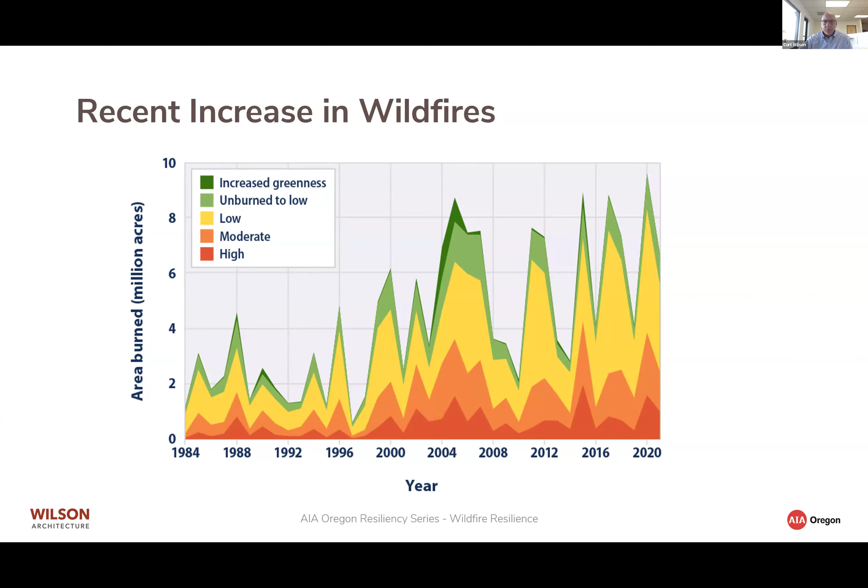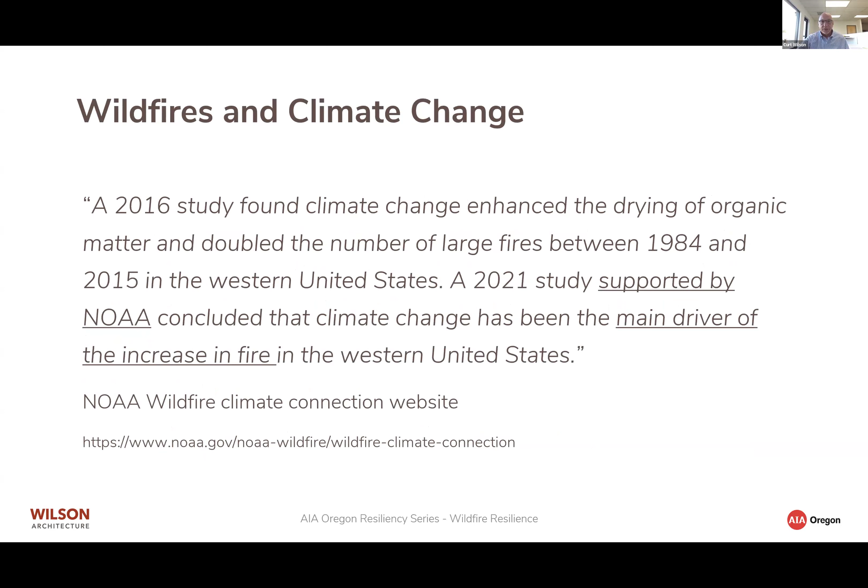This is information from EPA that speaks to this. You'll notice there are website references at the bottom of a lot of these slides, and these slides will be available later. But we're seeing it documented what we all see, which is that wildfires are a greater risk on the West and other places. It's also, I think, pretty well understood that there's a relationship between climate change, drying and warm conditions, and wildfires. And so again, wildfire resiliency is really important because this is part of life in the West.

I would appreciate if you would think about your roles here in listening to this information as both a design professional and as a community member. We're going to talk about some information that will help you be a better advisor to your clients, and hopefully something in here will help you grow your technical proficiency as it relates to building systems. But we also need to think about our roles as advocates for public policy that we want to see, and also volunteers in helping our neighbors. So there's a little bit of all of those things in here.

And why am I speaking about this? Heather mentioned some of my roles as practicing architect, and I was the executive director. I have been involved, prior to being executive director for AIA Oregon, I was legislative chair for AIA Oregon for about 20 years. So advocating at the state public policy level is something I have a lot of experience with. I was executive director in 2019 through 2021, so throughout the period of COVID in 2020 when wildfires occurred.

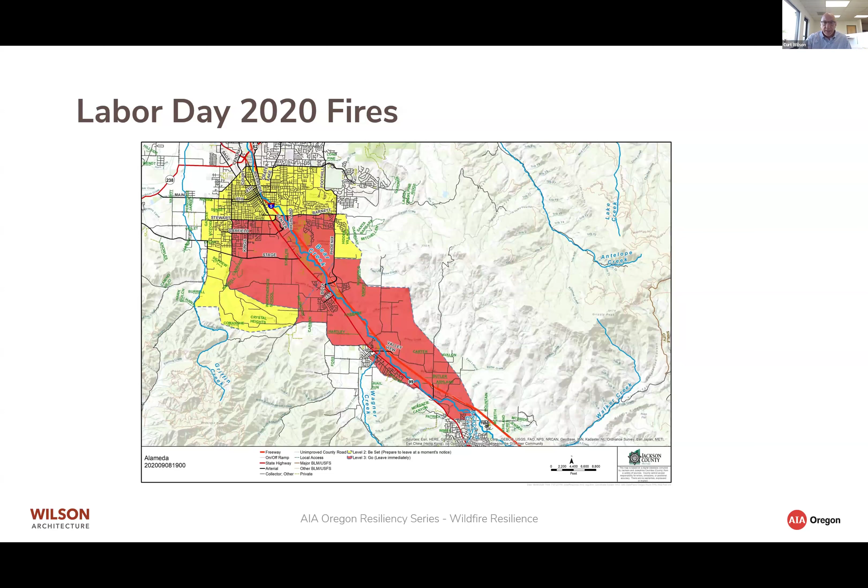One of the recurring themes here is that in a fire, some of the structures that so many of our people in our communities are dependent on for low-income alternatives are lost and not necessarily adequately insured, and therefore aren't rebuilt. So we'll just keep thinking about this as a housing problem.

The Holiday Farm Fire, though, is the one I'm going to focus on. It occurred in the McKenzie River Valley, starting just outside of Rainbow. If you recall that weekend, it was an unusual weather forecast because our normal weather patterns are winds blowing from the ocean to the east, carrying that ocean moisture. We had a red flag warning, the first time I remember hearing about one. We had winds blowing east to west, so it was a drier wind, and the winds picked up.

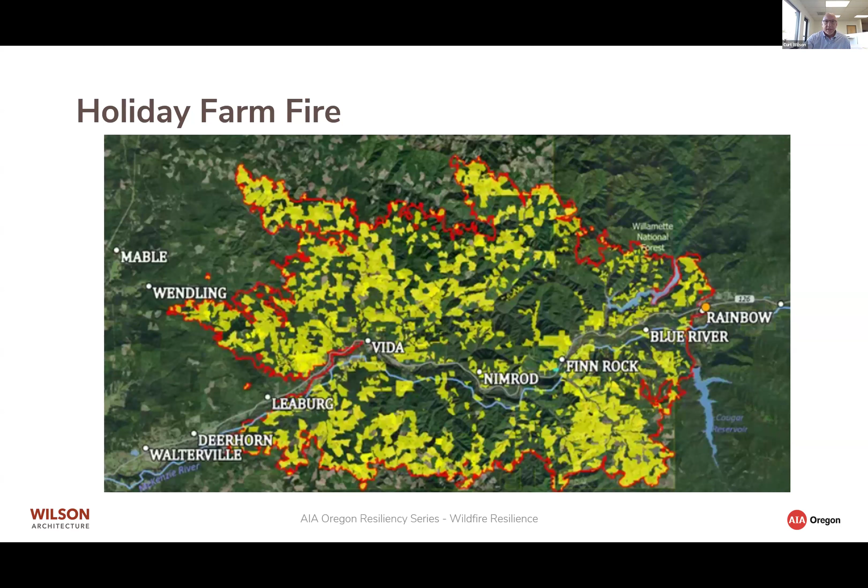The fire started, you can see there's an orange dot on the right-hand side in the east, and then it just blew and went at a very rapid pace down the McKenzie River corridor in the valley and devastated Blue River and these communities. It didn't hopscotch around like a lot of fires do. Most everything in its path, particularly at the beginning, was pretty well devastated.

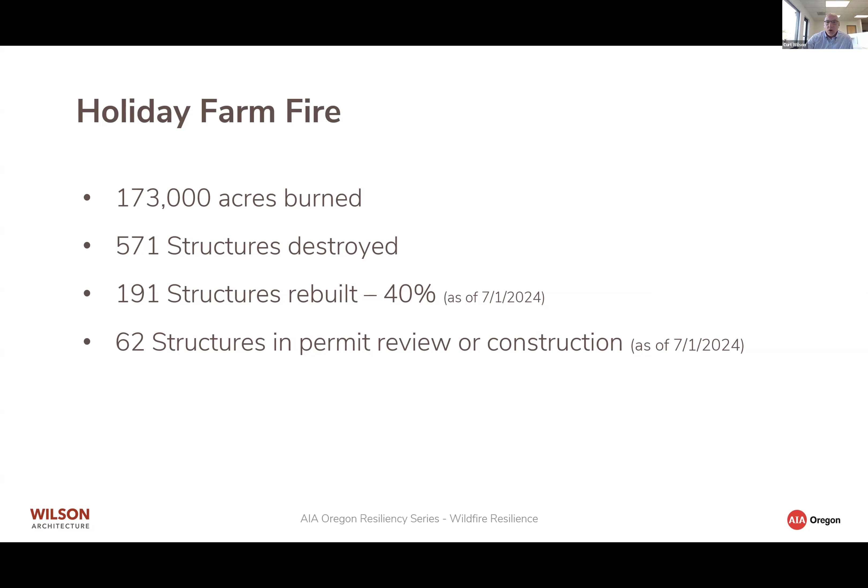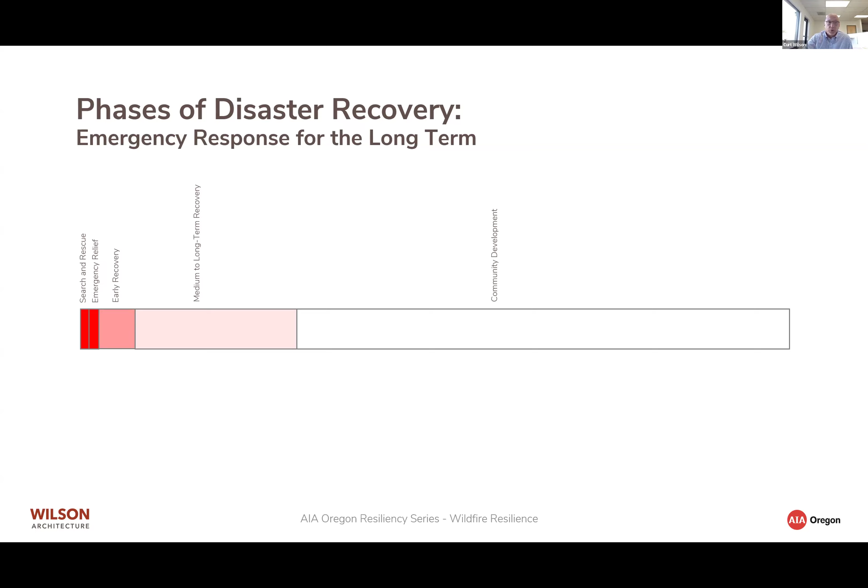So there has been recovery and rebuilding occurring. I go up there a lot because I have not only the clinic project, but another residential project going on. One of the things the fire did was, because of so much loss of trees, it opened up the view corridors in the valley and along the river.

You see a lot more than you used to see, and there's a tremendous number of houses. Many have been rebuilt along the corridor, and I would suspect that many of them have been rebuilt that you see along the river because they were adequately insured. That's an important point here that'll keep coming up.

I'm going to focus a little bit more specifically on Blue River. Blue River is a unique community, somewhat of a historical community along the river with a relatively defined downtown core.

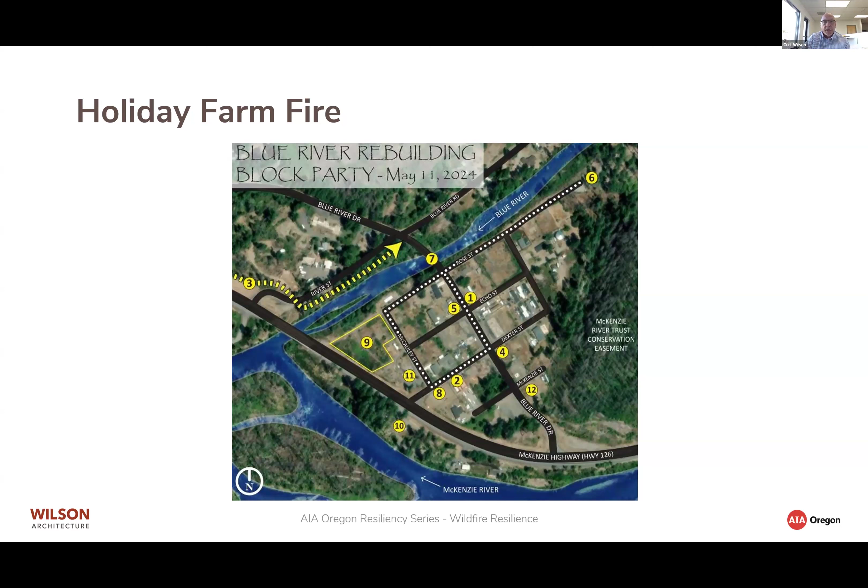But at this point, 4 years in, this is really about a housing production challenge, and either some level of barriers or multiple barriers have occurred for people not to be able to build at this point.

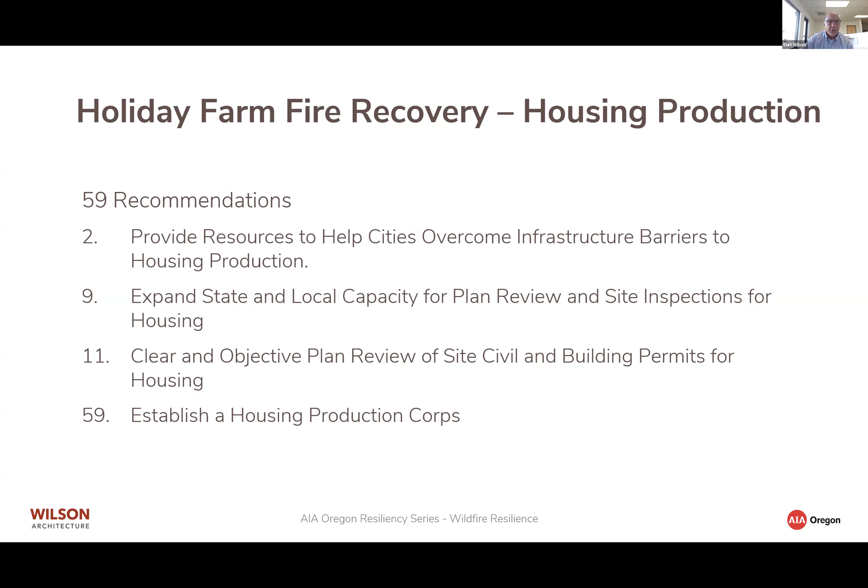The last one I think is also really important, and that is the labor and the staff and the capacity to be able to build. That's been another issue that has affected the McKenzie River Valley in terms of just getting a builder to go upriver and build.

Fundamentally, this is about financial support. You can overcome a lot of problems, but if you don't have the ability to rebuild your house or your business, you're not going to rebuild. And that 50% of the houses that have not been rebuilt, how many of those are never going to be rebuilt? How many people are not coming back to the community? That's a loss for important communities in rural Oregon, and it's a real concern that I have.

There are some things that are going on. I'm not going to speak too long on these, and there's a lot of information that could be shared, and hopefully you'll find, if you're interested, we can help you find some resources.

The McKenzie Community Land Trust has been set up in the area to construct initially six houses on a community land trust system. The community land trust will own the land, and individuals can buy the houses. So it's not only a way to get some houses developed, but it's also a lower entry point for people to be able to get into home ownership.

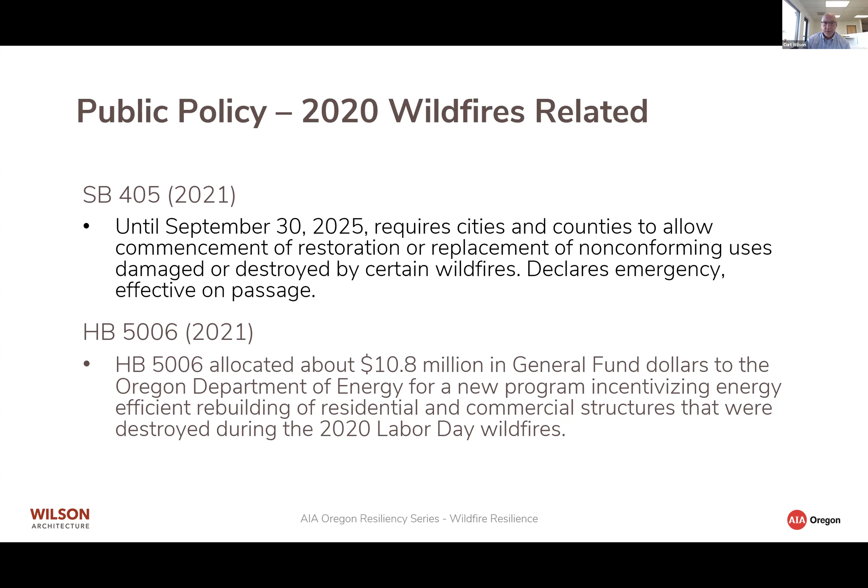A couple of other things specific to the Holiday Farm fire in Lane County - it was very difficult to rebuild, particularly in the first few months, given the time of year, the issues related to work-from-home environment and whatnot, navigating the permitting process. As an architect who does a lot of work in Lane County, navigating the permitting process is not easy, if you aren't in a position to be able to hire a design consultant, and trying to do this yourself is very difficult.

Lane County created a position called the permit navigator, and the person in that role was specifically brought on to help people get through the permitting process - what's happening next, what are the steps, what information do you need to bring to continue to move forward - and also help them get access to other resources. They also, about 5 or 6 months after the fires, decided to waive permitting fees as a way to lower barriers for people to get permitted.

And this is a time-restricted waiver, essentially. At some point, I believe this year, I haven't been able to pin down the specific date, this waiver will be rescinded, and people who haven't rebuilt will be expected to pay fees with everything else.

Associated with that, you also got priority in the permitting process. So in terms of the permit turnaround time, for someone with a lot of projects in Lane County, some of them not related to the Holiday Farm fire, this cuts both ways. Presumably, if someone got to move forward in the line, other people took a little bit longer to get their permit. So again, this is an issue that we need to think about in terms of how it affects all of us in the broader development process.

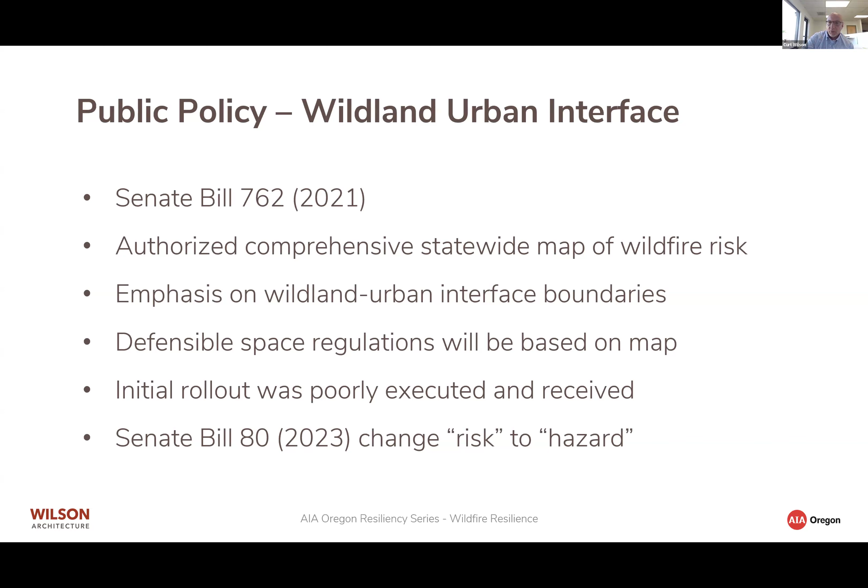One of the things that it did is change risk to hazard. The point here was that one of the reasons why it was so poorly received is people saw this map and said, we're upset that the state was telling the insurance industry that their property was of greater risk, as though the insurance industry didn't have this information or wasn't aware of it. So I think a lot of the reaction to the rollout of the map was unfortunately a reflection of some of the politics that we see in the world we're in.

But it's kind of gone through. The map was reevaluated and has been released in draft form earlier this year. The expectation is by October 1st of 2024, a final version of the map will be published, and then the rules that are based on this map can start to also move forward.

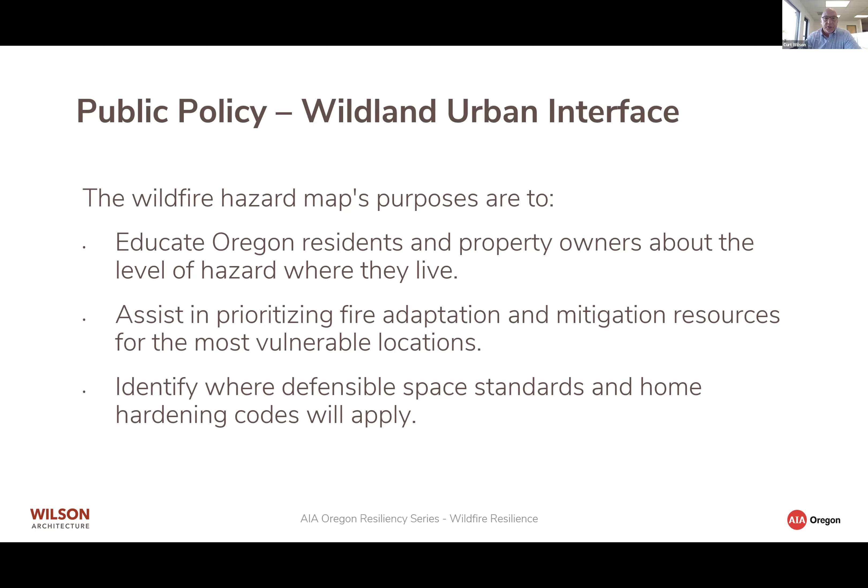A screenshot of the map for the state, you'll see that there are only really a few colors: low, moderate, and high hazard. And if you understand the geology or topography of Oregon, it's pretty well reflected as to where the low, moderate, and high hazards are.

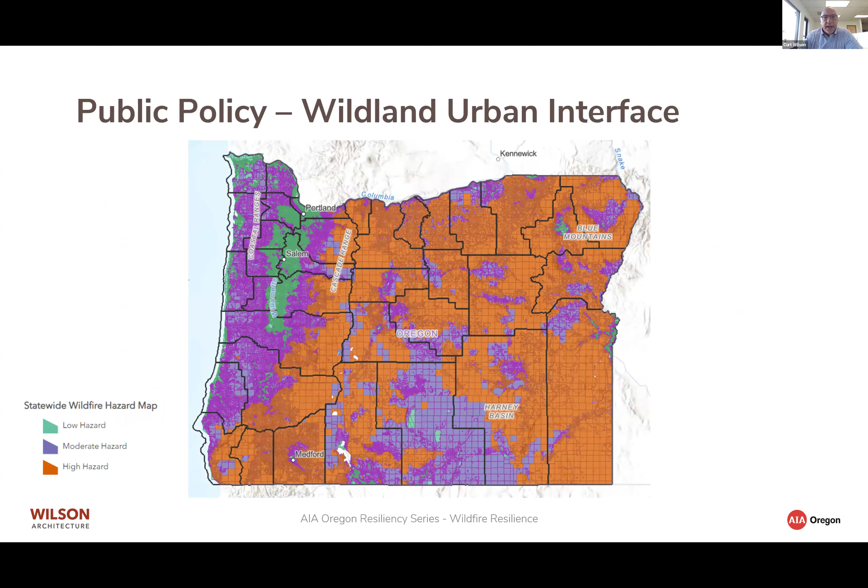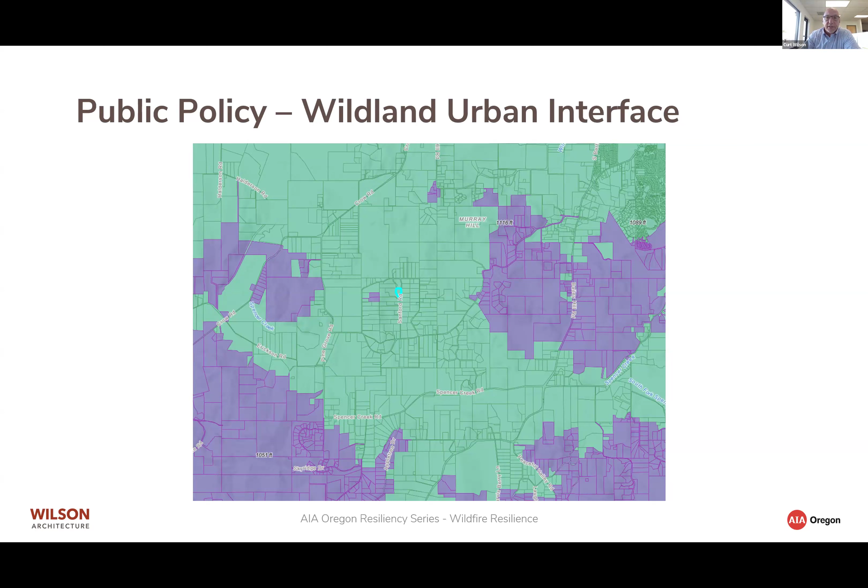The map is really quite an impressive tool. It gets down to the property level and shows our hazards. The property in the middle happens to be my house, so we can see individual properties. You can also see where properties are overlapping in those low to moderate and high to moderate standards or locations. So if you haven't seen it, it's worth looking at. If you Google Oregon Explorer wildland urban interface map, you probably will be able to find it.

So one of the things that it will do is trigger some defensible space requirements. There will be different requirements based on the hazard zones, managed through the Oregon State Fire Marshal's office. What's important to point out is that these standards are not only design and construction standards, but also maintenance and operational standards, like managing vegetation.

So it's going to affect every property. A lot of long dry grass requirements are in place now, and mowing is being required. But this will bring more requirements to maintain a defensible space than we're seeing now, and will require everybody to cooperate in this regard.

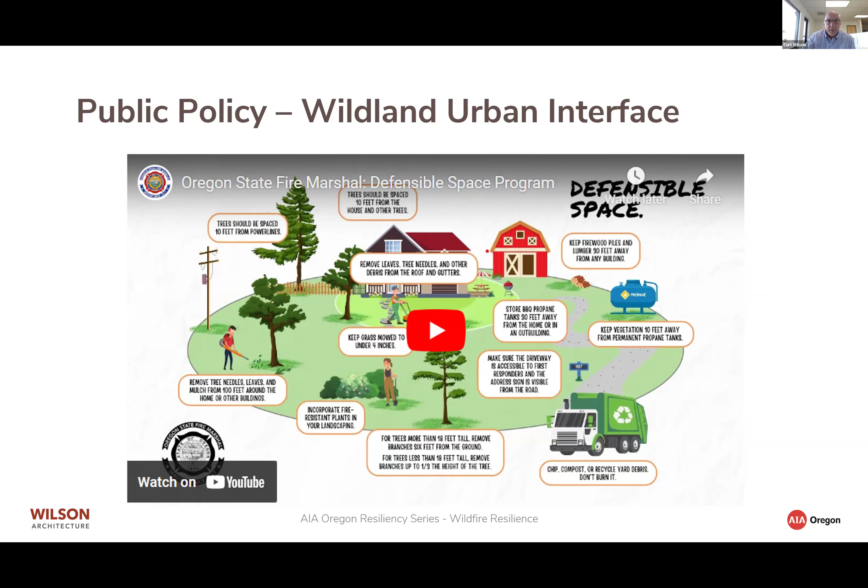One other important public policy development is more rules around public safety power shutoffs, also referred to as PSPS. These new rules were adopted by the Oregon Public Utility Commission in September 2022, and apply to utilities. They are intended to require utilities to shut down power under certain weather conditions to reduce the chances of sparking wildfires. The Holiday Farm fire cause hasn't been officially declared, but there's current litigation with some utilities, including Bonneville, related to the cause of the fire and whether it was a transmission line.

What's important is that there will be days - and we had one where I'm a little west of Eugene - where conditions were right for a public safety shutoff, and power was shut down for about 24 hours. It was a smoky day. There wasn't any fire, thankfully. But we are going to see more and more days where we have complete loss of power to communities, probably on days that are hot and smoky.

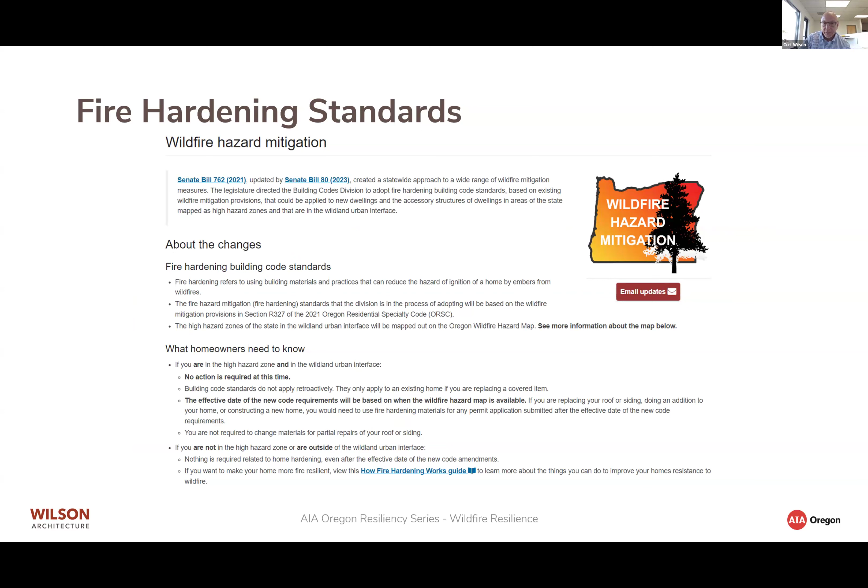So again, the rollout of this map is really critical to some of the requirements we can expect. And because some of these standards are referenced in the Oregon Residential Specialty Code, if you're practicing in residential work, I'd encourage you to find this website and become familiar with the standards that are going to be in code.

So we're going to talk about some of the fire hardening standards that are commonly available and used and referenced. I think it's important to note these are primarily recommendations for residential structures and homeowners, and they don't necessarily incorporate the level of building systems and envelope technologies that are beyond residential projects many of us work on in the commercial environment. But there are still important principles to understand.

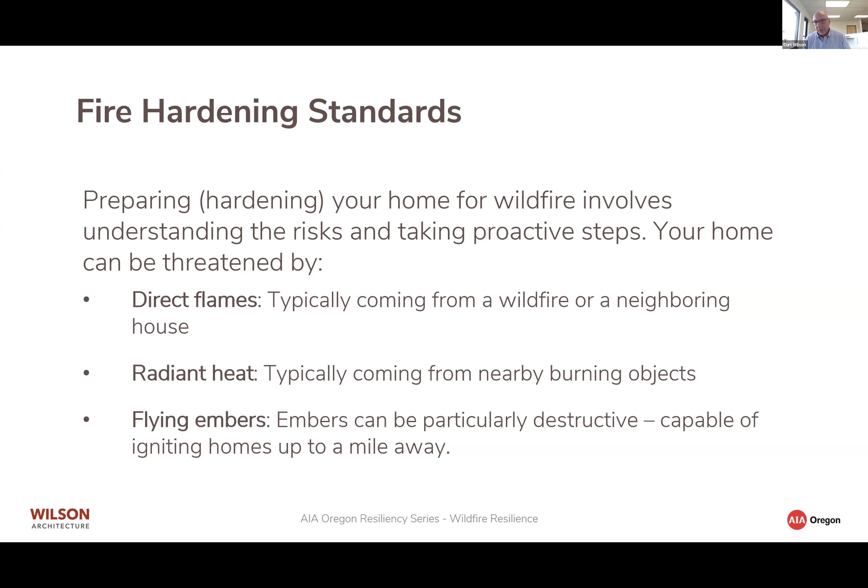They really relate to direct flame, radiant heat, and flying embers. The risk of fire outside the building is approached somewhat differently in these standards than a fire that starts inside a building, which our building codes are based on.

So I'm going to provide some information on four standards: Firewise USA, developed by the NFPA; Prepare for Wildfire, information from CAL FIRE; the Wildfire Hazard Mitigation Handbook from FEMA; and some research from IBHS, an insurance industry-funded research group that's got a lot of really good information.

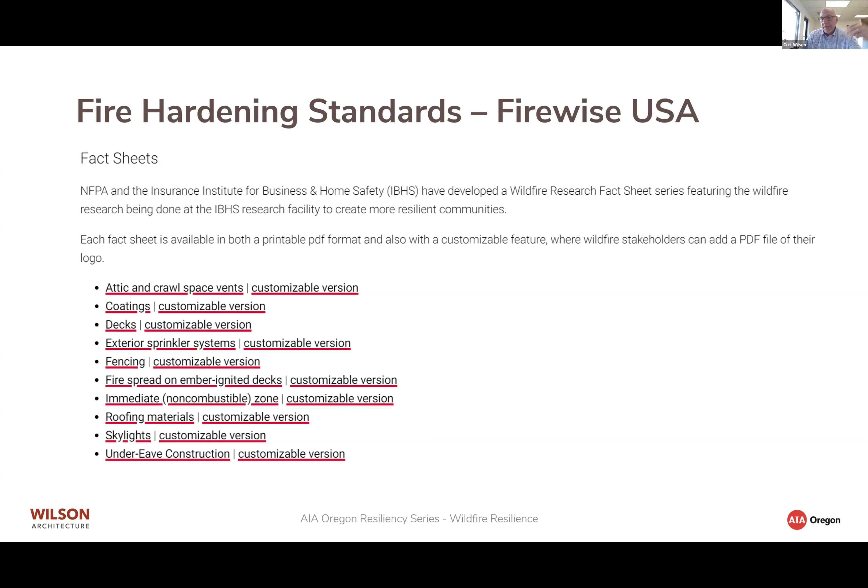One of the things on the Firewise USA website is fact sheets related to recommendations for design, construction, and operations. They're organized here in the bulleted items on the left. I'm not going to go through all of these, but I do want to show you the format of the information and a few examples. When you click on any one of those hyperlinked bulleted items, it'll pull up a PDF.

These are a few under eave construction and roofing materials. You'll see under eave construction comes up a lot in fire hardening standards. Part of that is fire builds up against the house, that heat buildup as the heat rises, the eaves and overhangs restrict the movement of the heat and therefore build up more heat. So a recommendation that's fairly common is to minimize overhangs.

You're going to see a lot of references to minimizing ventilation, roof ventilation, which of course, if you're putting in batt insulation, you don't want to eliminate airflow over that batt insulation in the roof. What those standards are really looking at is...

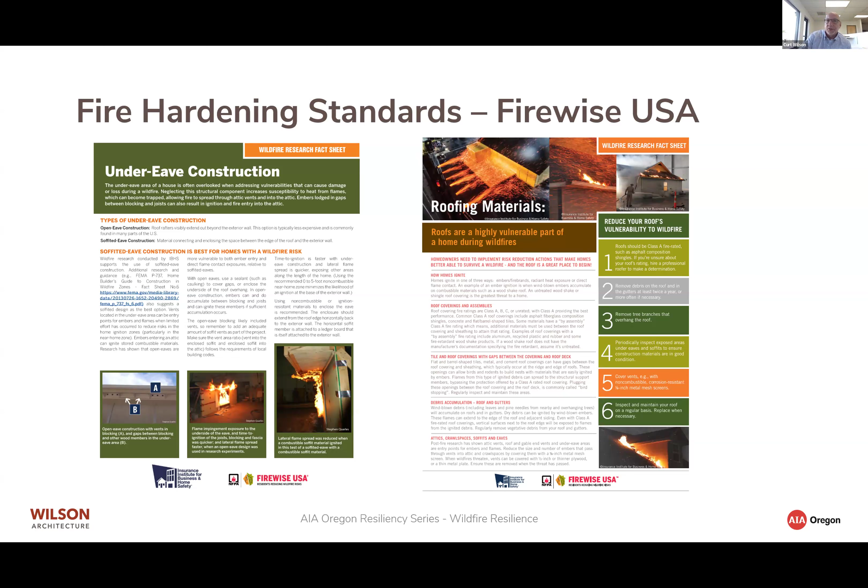Again, with roofing materials, you don't necessarily see it on this page, but you're going to see references to Class A roof standards. I think that's one area of direct parallel between the building code and these fire hardening standards, where a Class A roof is the direction you want to go for fire hardening.

These standards also get into things beyond the building. That previous slide had page 4 -- well, I'm sorry, I'm bouncing around a little too much. But decking and fences and structures against the building, and also ground covers. All of these standards really advocate against using wood-based bark and materials as ground cover, and instead using rock or pumice or something non-combustible. And coatings too. There's some good information here -- I encourage you to go to this website to look at it.

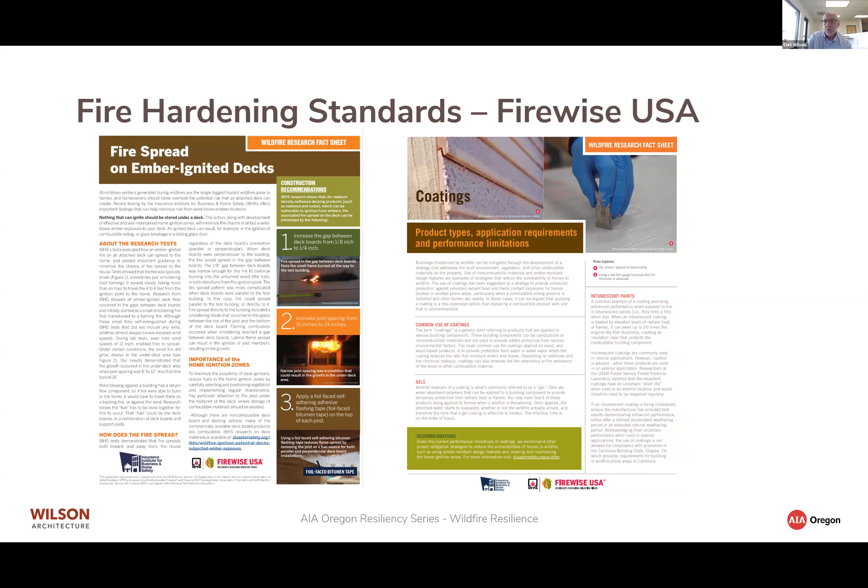The immediate non-combustible zone is where they're talking about this. Some of these examples here are testing conditions showing how fast, particularly in this time of year where it's still so dry, a wood-based ground cover will ignite and then start to build up against the house, causing fire at the house itself.

There's also a standard, some information about exterior sprinkler systems. I think you won't be able to read it on the screen, but it does say in the recommendations that this is only recommended as a supplement to all other fire hardening standards. Fire sprinklers are very effective inside buildings, less so for a fire coming from outside the building.

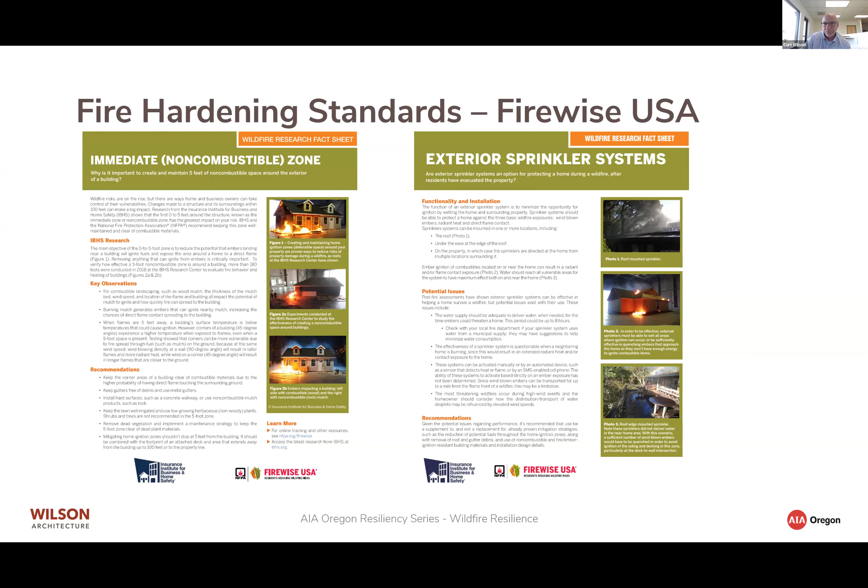CAL FIRE has a great website. The Get Ready website has a lot of resources and pages, though not a lot of great documents to pull off in a PDF. I'd encourage you to go to that website, the link is listed there. And then the FEMA Wildfire Hazard Mitigation Handbook for Public Facilities is actually dated 2008. I haven't been able to find a more recent version, although I think there must be one. It's got a ton of information, and it is in a PDF.

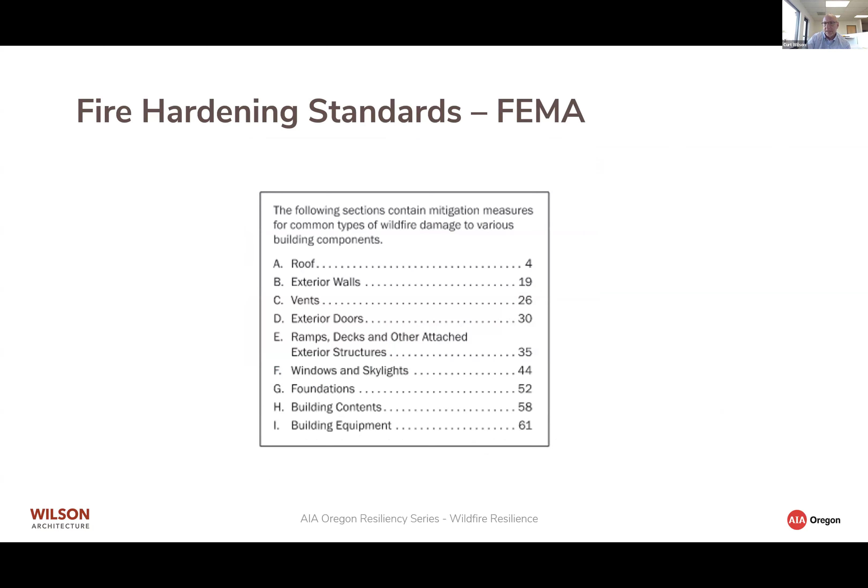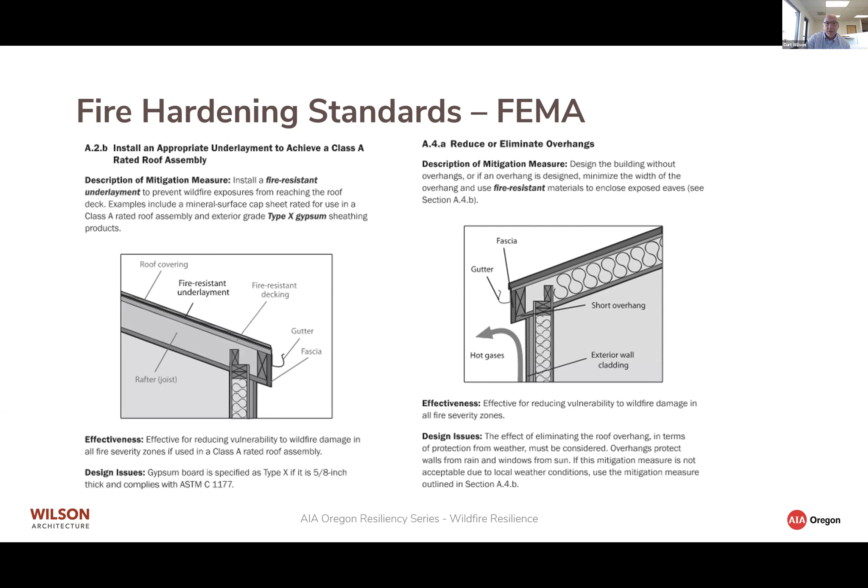A lot of the information I've seen so far is really on those issues of ignition, initial ignition systems, and really trying to promote ignition resistant systems. They aren't necessarily looking at the duration of heat building through walls as we think of a fire rated assembly.

I do understand they are starting to test assemblies, taking a broader view of testing assemblies, and things like the behavior of a ventilation system we might have in a rain screen, where we've got good top and bottom ventilation to allow water to get out and away in our envelopes, and what that may or may not be promoting in terms of heat transfer and fire transfer in a wildfire-like setting. Hopefully there's some more information and resources that can help us think about those kinds of systems.

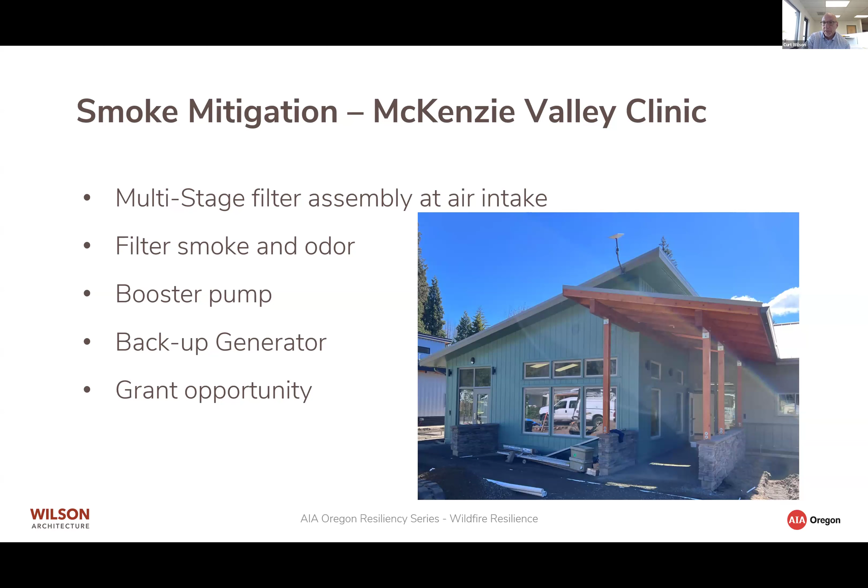Our smoke mitigation system is a multi-stage system that filters out smoke and odors. All of our outdoor air comes in through this heavily filtered system. It does require a booster pump, so there's some additional cost to that, but we were actually able to get a grant and pay completely for the smoke mitigation system at the clinic. The clinic is a relatively small building with 3 primary exam rooms.

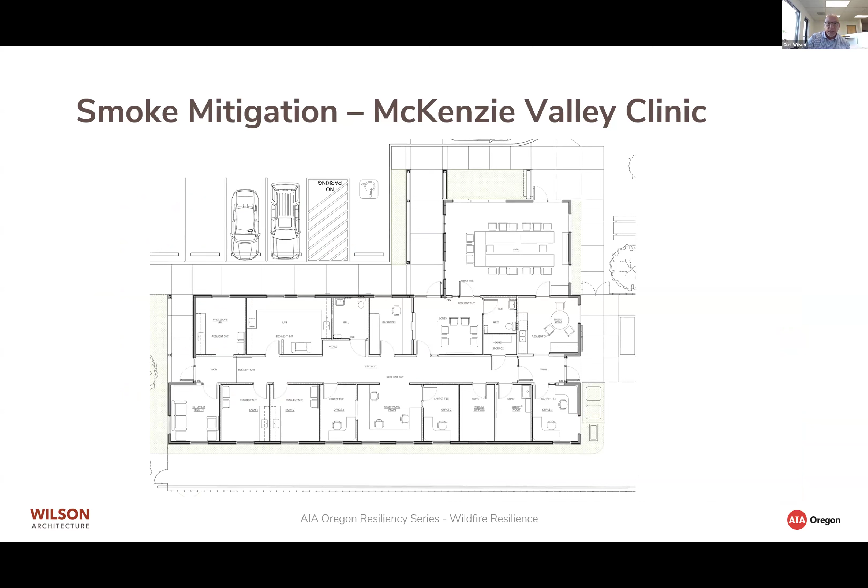It's about 3,300 square feet, the floor plan that you see here. A relatively simple double-loaded corridor. The primary bar is the clinic, and the space on the upper portion is the community room we saw the image of. Our mechanical system is relatively simple, with multiple air handlers serving zones.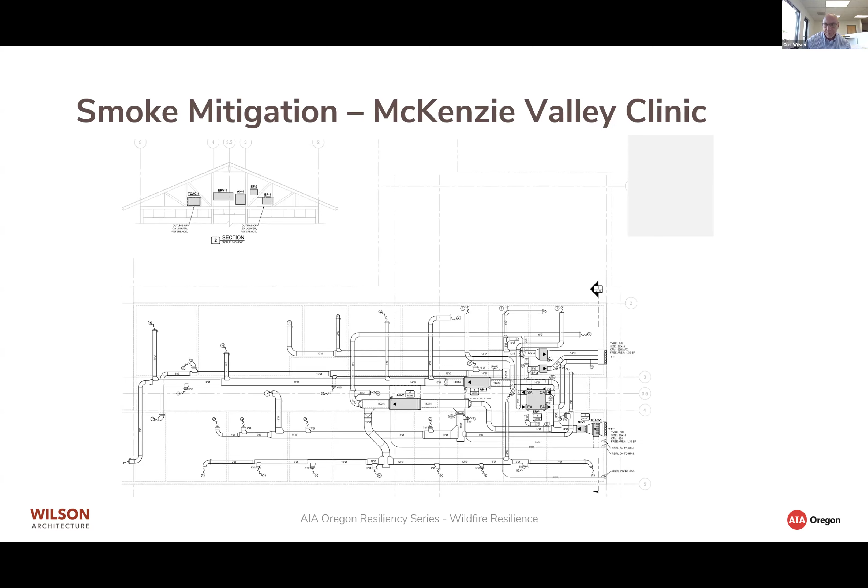In this area, if you can see my screen, on the right-hand side down below is our air intake. Our smoke mitigation system is located up in the attic space, just where that air intake is coming in. It's really very simple, a robust multi-stage filter. It has a first, second, and third stage filter of different materials, filtering different particulates related to smoke and odor.

And that's really the system. It got a little bit more maintenance, and it's got some more costs in it, since the operation with our booster fan is going to require using a little bit more energy.

We did look at an option of having a separate switchable air intake system, where on a non-smoky day we could run our air intake through a conventionally filtered system, so we weren't running the booster fan all the time. But that required, in this relatively small project, two air intake systems. So we decided to go with one and always run our air intake through here.

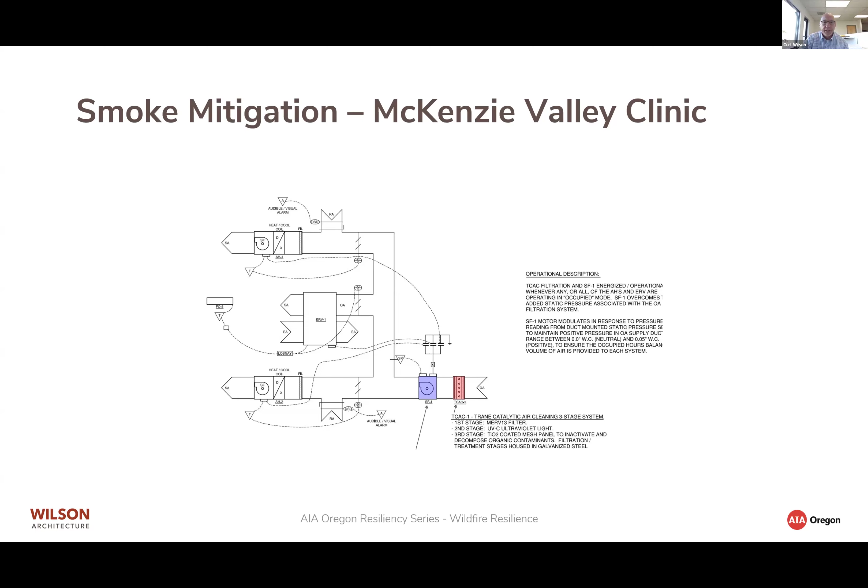Our other project I'm going to highlight is centered in Oakridge, in East Lane County in the foothills of the Cascades, on its way to Willamette Pass on Highway 58. It's an area that suffers chronically with air inversions in the winter. It's historically had a lot of home wood fires for heat, so air quality in Oakridge is always very challenging. That had been a winter problem, and now air quality has become a pretty pronounced summer problem in Oak Ridge with the number of wildfires around it.

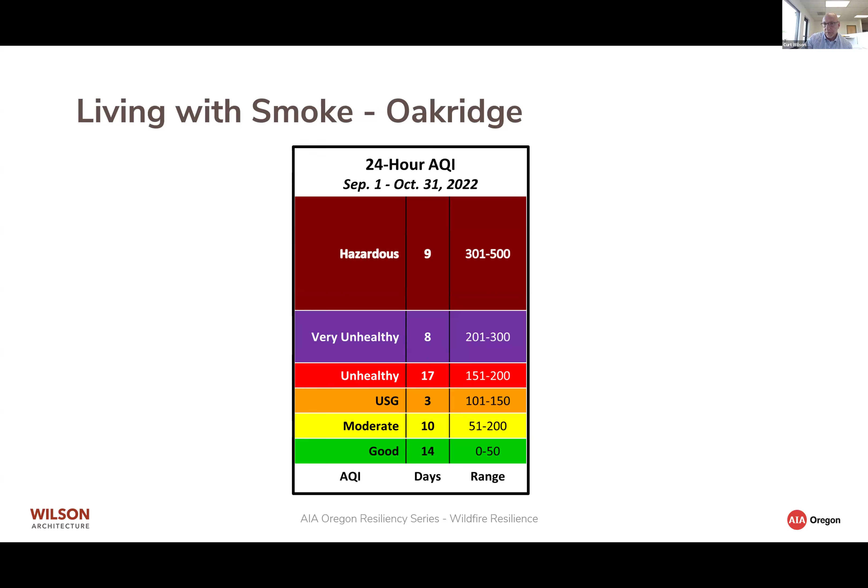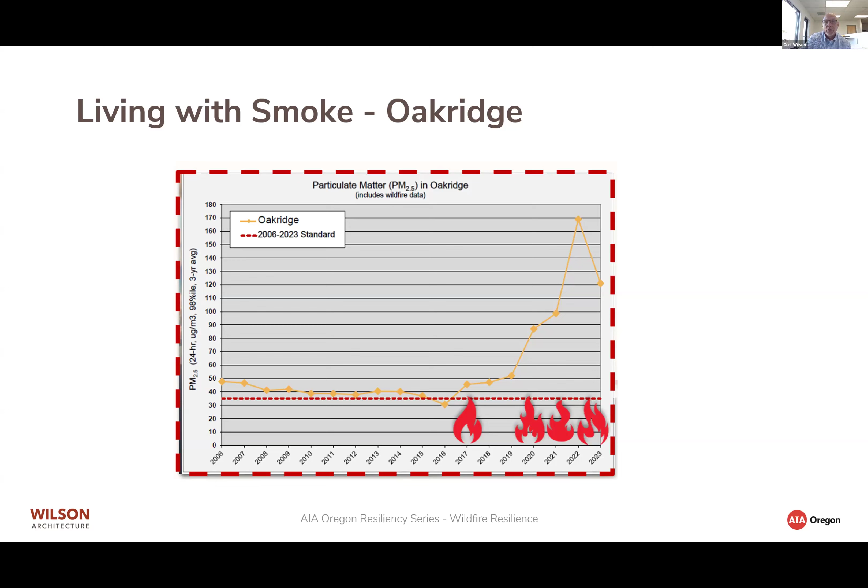So it's a real issue for people living in Oak Ridge. This chart shows particulates in the air. That red dashed line running across the chart shows what a normal level of particulates in the air looks like. You can see Oak Ridge is always above that normal, acceptable level, and in the last 10 years it's had a significant number of days or times of the year with a lot of particulates in the air.

So Oak Ridge is part of a grant recently received through Lane County. This is an EPA grant, funding the Lane County Resiliency Hub program. There are resiliency hubs in six communities in Lane County, including Florence, Eugene, Springfield, Cottage Grove, Veneta, and Oak Ridge.

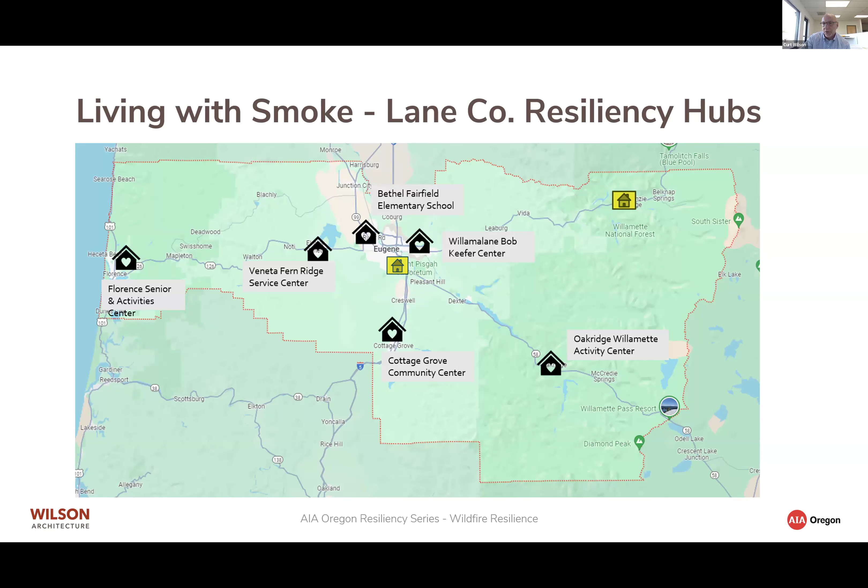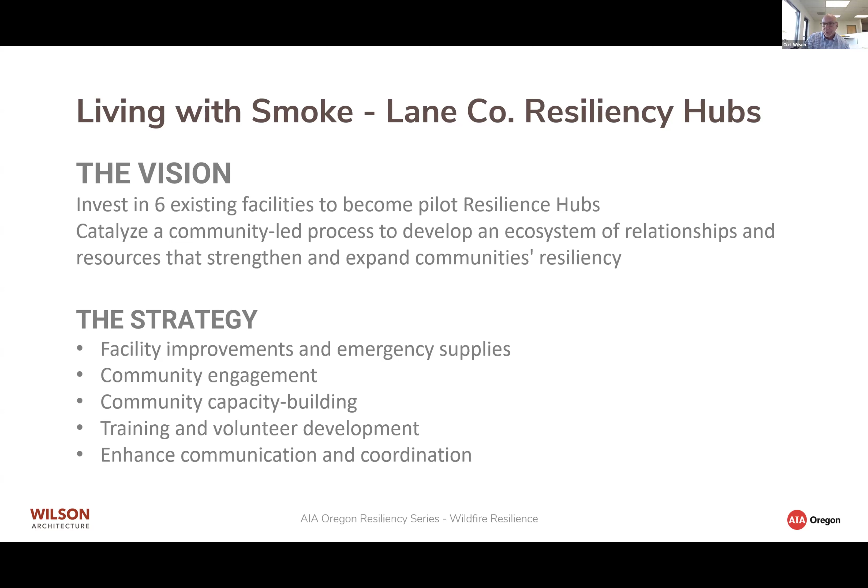The purpose of the resiliency hubs is really to provide a community-based post-disaster recovery location, not just for wildfires but other emergency situations and natural disasters, and to provide not only spaces for people to go but also the training to provide assistance during those periods. If you're not aware of the Resiliency Hub program, you'll probably learn more, because this grant was just recently received, but it's an ongoing effort of Lane County through Lane County Emergency Management in cooperation with other agencies.

So the Willamette Activity Center in Oak Ridge is the Oakridge-based facility that will receive funding from the Resiliency Hub program. It's a project I've been working on since 2022. It's a former elementary school that's been used for the last couple of decades as a center for social service agencies and a variety of others in Oak Ridge. It actually lost occupancy for some insurance-related reasons a couple of years ago. It's got some chronic roof leaking that we're addressing now, but it received a lot of funding over the last couple of years to renovate the building.

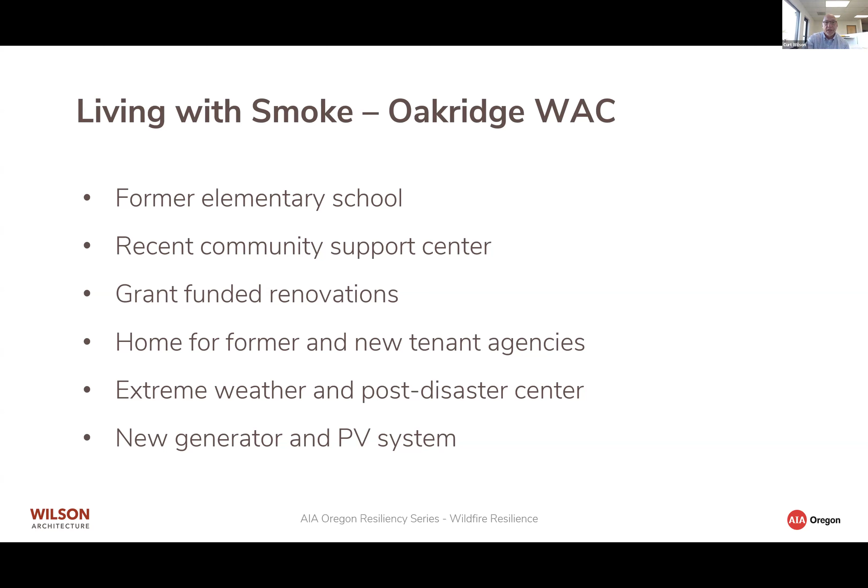Not only will it be the center for agencies that have been there before and new agencies, but it will also function more as a resiliency hub. It's really well tied into being a post-disaster and extreme weather center, and fundamental to that will be a generator and a PV system.

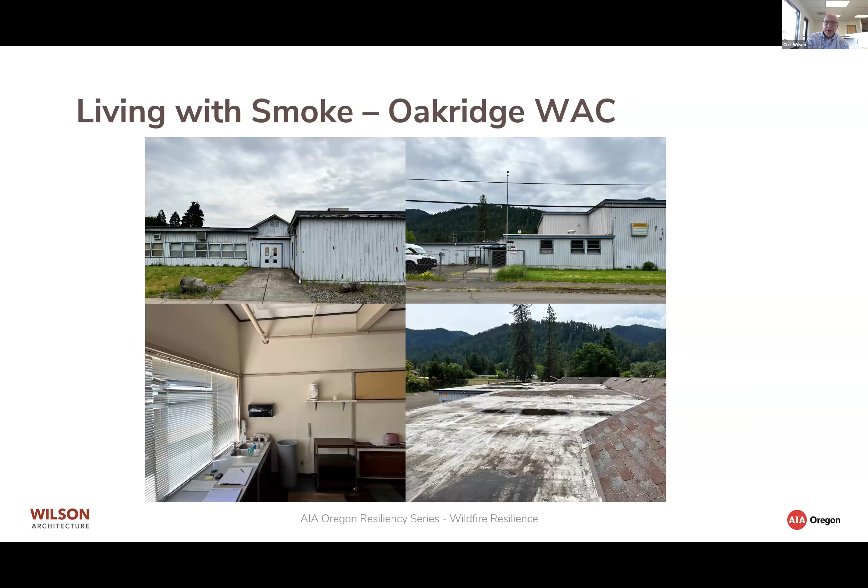The WAC is a building that only a preservationist could love. It doesn't look great from the outside, but it really does have some strong infrastructure components on the inside. It's fully sprinklered, it's got a good structural system, and it's organized, as an elementary school, around a series of three classroom pod buildings connected by a covered walkway. There's plumbing distributed throughout the building, and there are big rooms throughout the building.

The gym, the cafeteria, all activity or spaces that with a little TLC can serve a variety of uses. It's also positioned just one block off the highway with a large parking lot, previously a playground parking lot, adjacent to it. Very flat site, very flexible to serve a variety of needs in both day-to-day activity and a post-disaster situation.

So through funding the Resiliency Hub and some other grants, we're looking at converting the building in the area on the lower left. This is Module C, the gym. We're going to be improving both Module C and Module A, which has funding for some seismic upgrades and other structural and finish upgrades.

We're going to be adding, behind the gym in what was the auditorium or stage dressing areas, a series of individual showers and restrooms. So that gym would be used as a community center, a multi-day overnight community center, or an extreme weather center with an increased number of showers and restrooms.

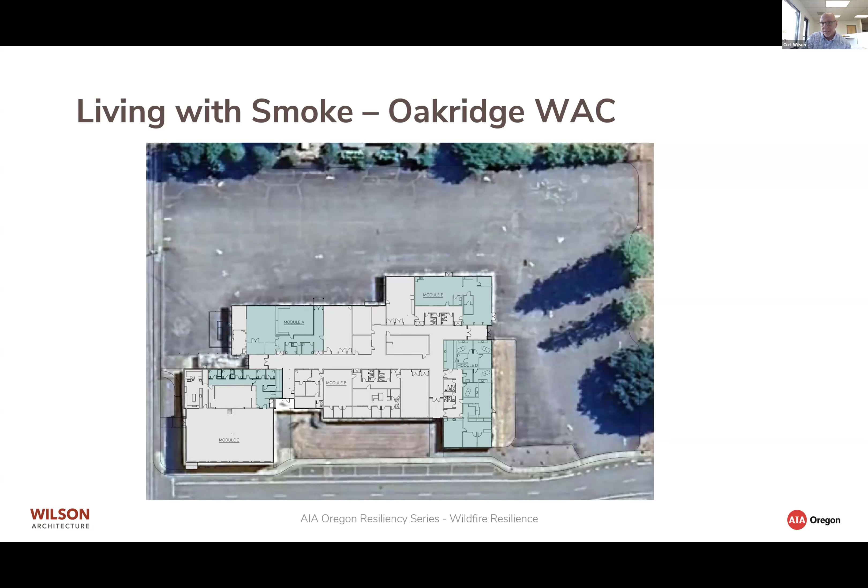One of the things we're also very excited about is we just recently received funding to install a large PV array system throughout this roughly 30,000 square foot building, and you can see the PV arrays reflected here. Most of the roof is going to get solar on it.

The idea here is that we would be integrating the solar arrays with our generator so that we can power the building for multiple days, certainly through our public safety shutoff periods, but also for prolonged weather outages, to be a place able to support people in Oakridge.

Not only the social service activities going on, whether it's the health clinic or the food bank, but also a place for people to go. So this is an important resiliency component, not only for wildfires, but other natural disasters.

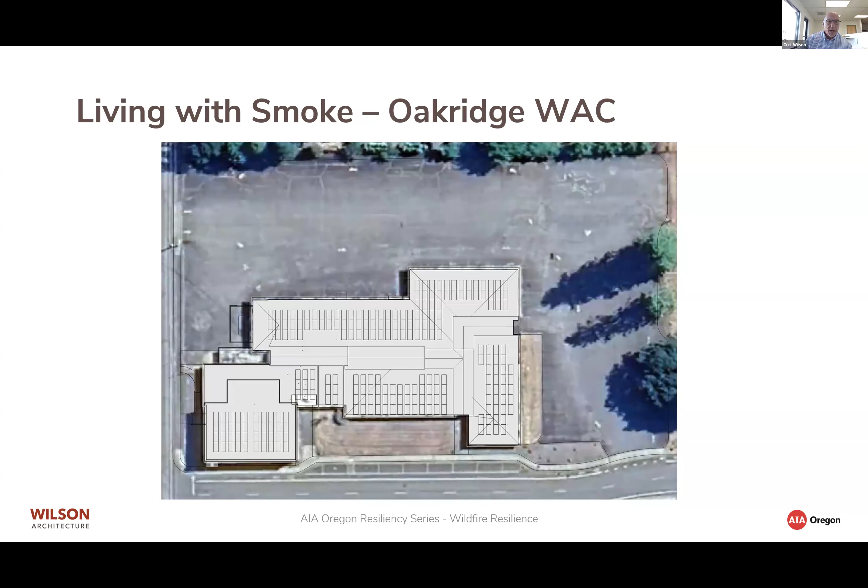Kurt, are you able to pull up your chat box? Because there are a couple of questions in there. I know Alan, sure, Scott has one, hang on. Yes, okay, and Kristen, let's see, too. So I think the first question is from Paul, and then Kirsten has one, and Alan. Are you able to see those? Yeah, do you want me to read them?

Kirsten asked, is the smoke mitigation powered by the generator? I assume you're talking about the clinic project generator. The generator is a backup generator, so our primary emergency backup systems are not connected to the generator. That allowed us to get this generator incorporated into the building with a little less initial expense. But it is sized to be able to run the building, including the smoke mitigation system.

I think it's also ironic, if that's the right word, that it's powered by propane. I've been talking about fire hardening and ignition-resistant materials, trying to minimize ignition-resistant risks, and by the way, we have a 1,000-gallon propane tank about 10 feet from the building. We have a really small site, we need a generator, we need some fuel to support it, and so we have to make these trade-off decisions in this context.